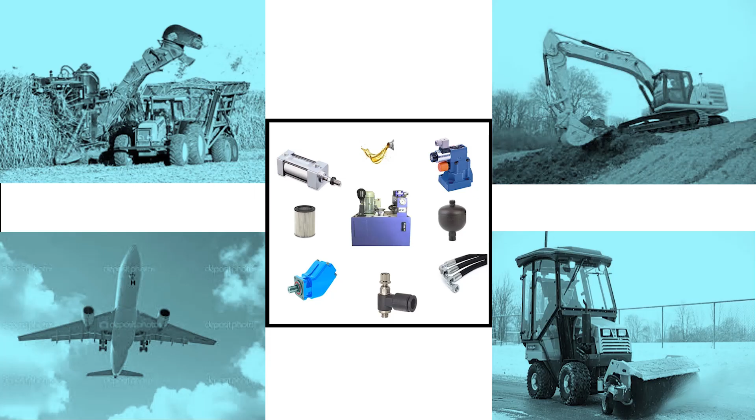Now we will see, in a certain hydraulic system design, it is desired that when the predetermined system pressure is reached, the pump should stop pumping further hydraulic oil to the system. This is possible if one can use a pressure compensated variable displacement pump.

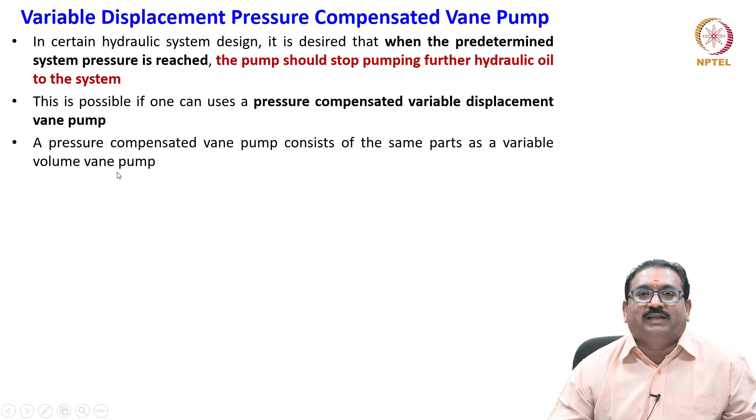A pressure compensated vane pump consists of the same parts as the variable volume vane pump we discussed, but in addition it has an adjustable spring which is used to offset the cam ring, as shown in the figure here. In the pressure compensated vane pump, we have one stiff spring which can shift the cam ring to the desired position.

When the system pressure acting on the inner contour of the cam ring is high enough to overcome the force set by the spring, the cam will recenter and, except for leakage, pumping ceases, meaning zero flow. System pressure is therefore limited to the setting of the compensator spring.

What is the arrangement here? In the variable displacement pressure compensated vane pump, all parts are the same - slotted rotor, cam ring, vanes - but shifting of the cam ring is done through the very stiff compensator spring, whatever pressure you set. For example, I am setting here 100 bar.

On the other side, the discharge pressure is acting. If the discharge pressure exceeds the setting pressure, it will push the cam ring to the center. When it is centered, oil will recirculate. This is the basic mechanism in the pressure compensated vane pump.

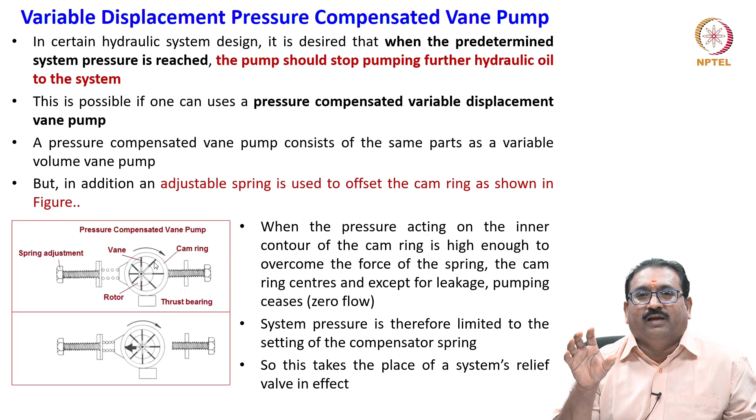When we are using the pressure compensated pump, there's no need for pressure relief valves because it performs the same function. Otherwise, every pump in a fluid power system is equipped with a pressure relief valve. With a pressure compensated pump, no need to worry, because automatic adjustment of the cam ring is done through the system pressure itself.

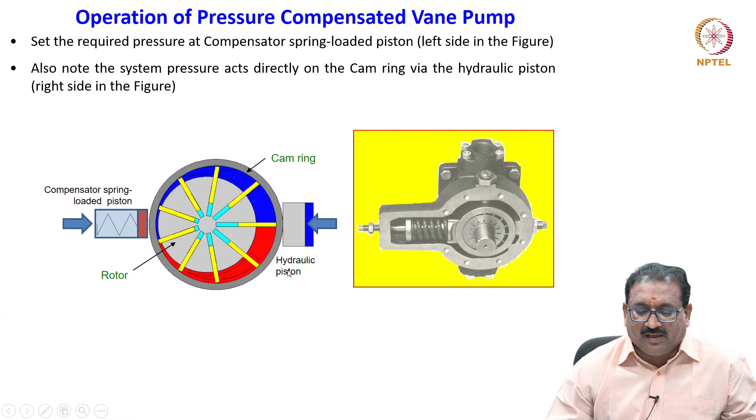How is this done? Set the required pressure at the compensator spring loaded piston. Also note the system pressure acts directly on the cam ring via the hydraulic piston on the other side, meaning the discharge pressure is acting here.

When the discharge pressure is zero at the beginning, the pump produces maximum flow because maximum eccentricity is provided by the spring pushing the cam ring. When the system pressure, meaning the discharge pressure, increases beyond the set pressure at the compensator spring, the system pressure pushes the cam ring against the compensator spring loaded piston to reduce flow.

When the discharge pressure continues to increase further, the hydraulic piston pushes the cam ring to achieve zero eccentricity and hence zero flow.

The mechanism here: this is a stiff spring used to push the cam ring, and on the other side the delivery pressure or system pressure is acting. If this pressure keeps increasing, it tries to push the cam ring against the compensator spring.

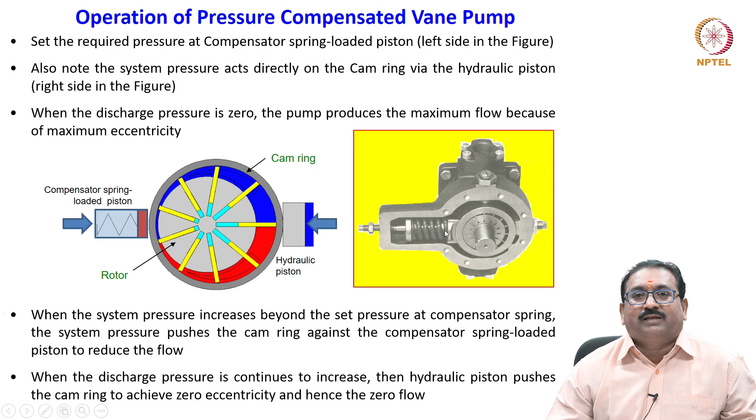Now I have drawn the pressure compensated vane pump's pressure versus flow graph. At maximum eccentricity, you get maximum flow. If pressure is increasing, you will see the flow change.

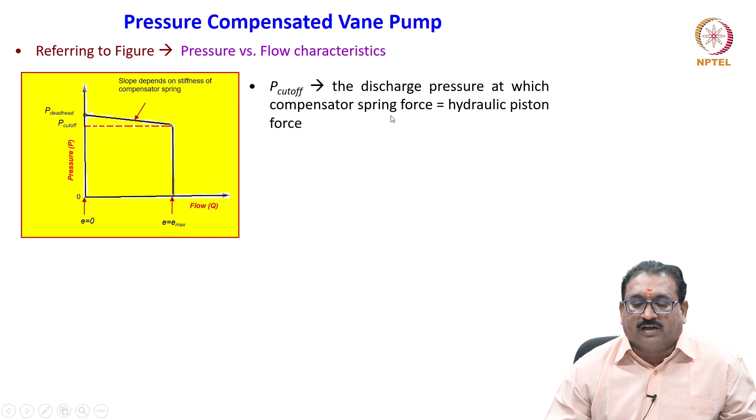What is this P cutoff? The discharge pressure at which the compensator spring force equals the hydraulic piston force - this is the P cutoff.

With further increase in system or discharge pressure, when the P deadhead pressure is reached, there is zero eccentricity and the pump will not produce any flow - zero eccentricity, zero flow. So the maximum pressure achieved is called P deadhead, at which point the pump is protected because it produces no flow.

As a result, there is no power wasted and no fluid heating.

Graphically, this pressure compensated vane pump is represented like this - as I told you, the symbol shows the outlet pressure of the pump always getting feedback against the compensator spring. When the force from the compensator spring matches the force from the system pressure, we call that P cutoff. If pressure increases further, you get zero flow.

This is also represented in another way. When the cam ring coincides with the rotor axis, there is no flow, correct? But leakage flow is there, which you can call the case drain, going to the tank.

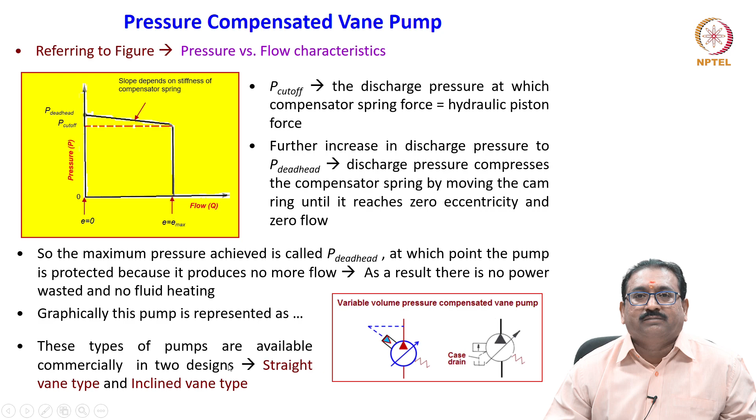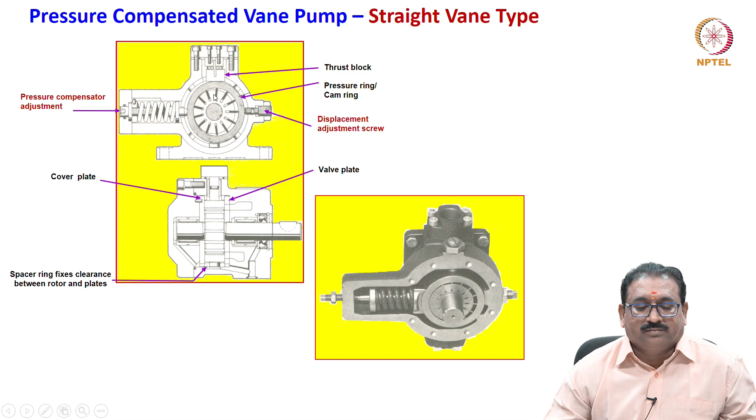These types of pumps are available commercially in two designs: straight vanes and inclined vanes. You will see the sketches here - this is the straight vane, vanes are straight. See here, straight vanes. Or the vanes are angular vanes, inclined at a certain angle.

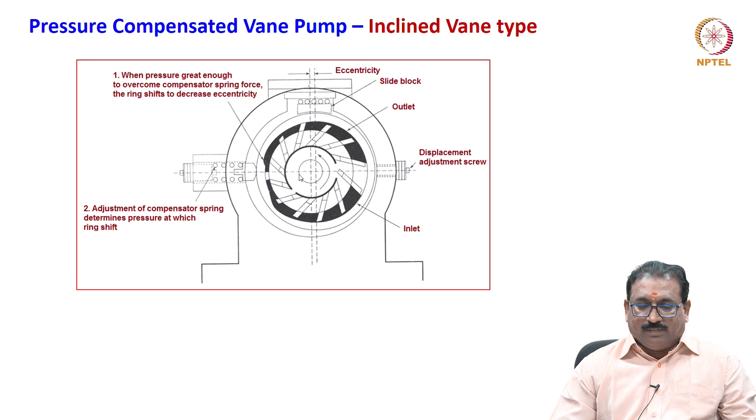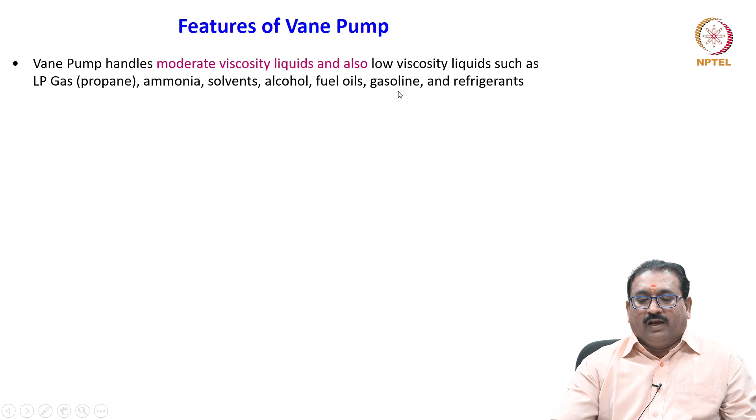Both designs are available in the pressure compensated vane pumps. Very quickly I will give you some features of vane pumps. Vane pumps handle moderate viscosity liquids and also low viscosity liquids such as LP gas, ammonia, solvents, alcohol, fuel oils, gasoline and refrigerants. No internal metal to metal contact and self compensation for wear enable them to maintain peak performance on these non-lubricating liquids.

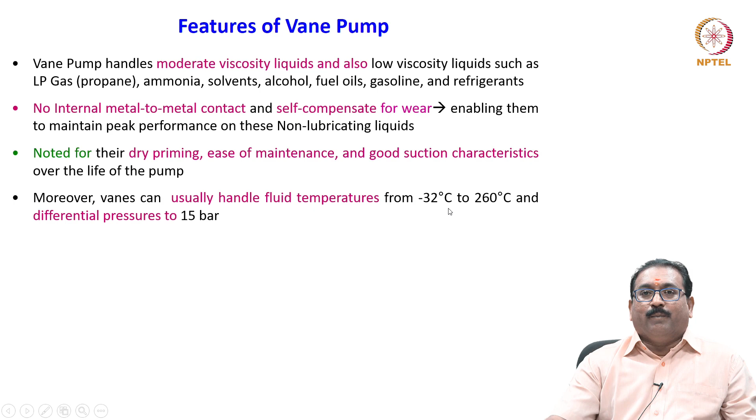Vane pumps are noted for their dry priming, ease of maintenance, and good suction characteristics over the life of the pump. Moreover, vane pumps usually handle fluid temperatures from -32 degrees centigrade to 260 degrees centigrade, and differential pressure up to 15 bar.

The discussed vane pumps are hydraulically unbalanced. What is this, friends? As we have seen in all the cases, the outlet pressure is higher than the inlet pressure, meaning this discharge pressure is acting on the vanes as well as on the rotor bearings. So there is always a side load exerted on the bearings of the vane pump because of the unequal pressure - outlet pressure is much higher than the inlet pressure. That is why it is called hydraulically unbalanced.

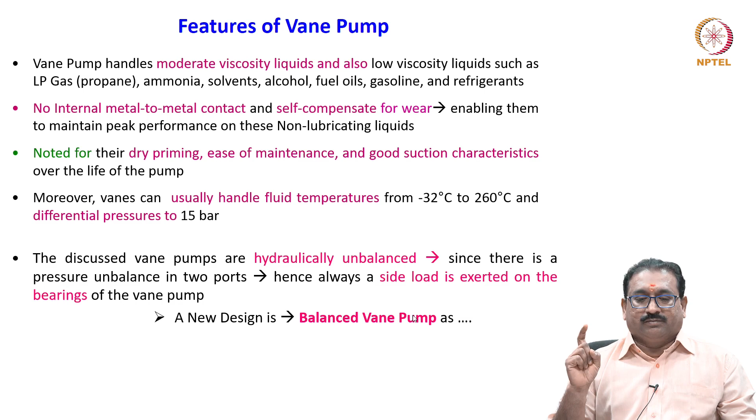What to do now, friends? New designs are available, what you can call a balanced vane pump, where a hydraulic pressure balance is achieved during operation. You will now see the balanced vane pump shown here.

What are the changes, friends? Here you will see the rotor, then you will see the elliptical housing or bore. The bore is in elliptical shape, but the rotor - you will see the elliptical housing bore and the rotor axis are coincided. No eccentricity here.

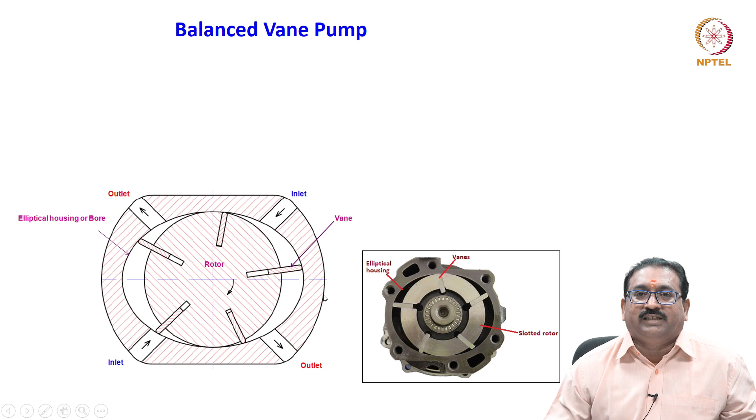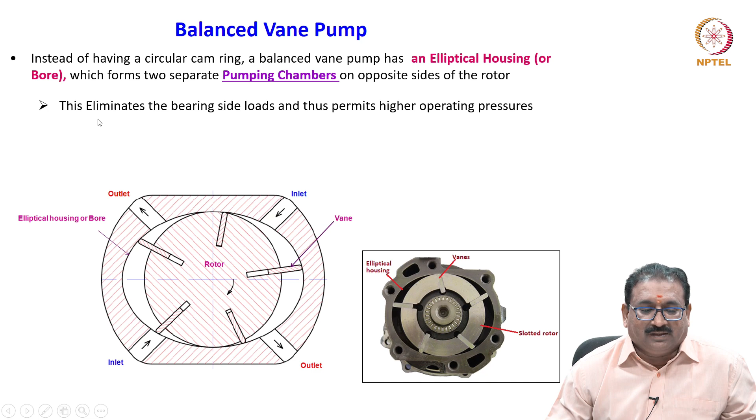So here, instead of having a circular cam ring, a balanced vane pump has an elliptical housing or bore which forms two separate pumping chambers on opposite sides of the rotor. This eliminates the bearing side loads and thus permits a higher operating pressure.

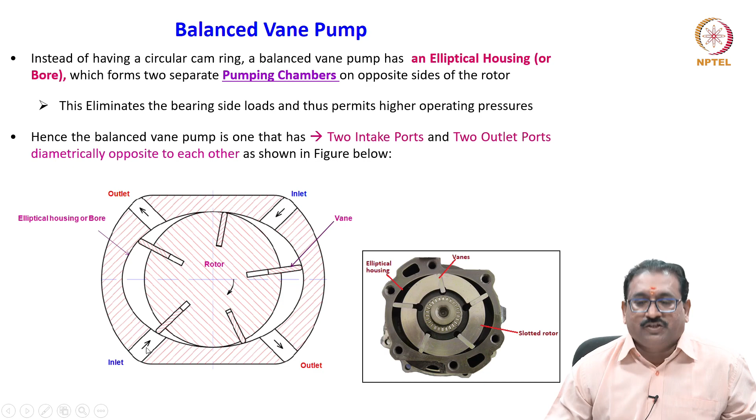Hence, the balanced vane pump is one that has two intake ports and two outlet ports diametrically opposite each other, as shown in the figure here. Two inlet ports and two outlet ports due to this design, but the opposite ports are pressure balanced. Also in actual practice, the inlets and outlets are connected to the respective ports.

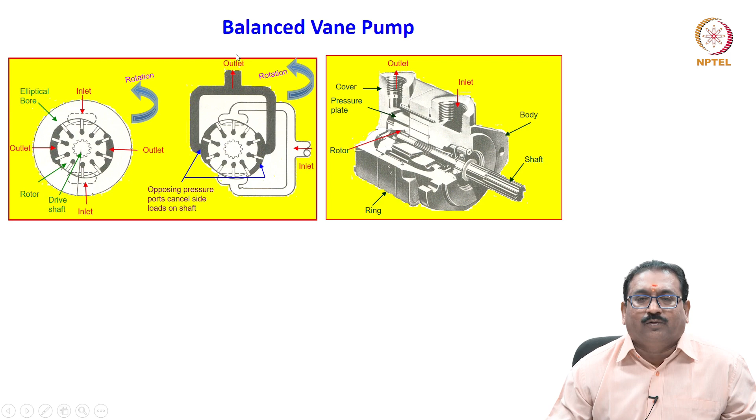Please note, the balanced vane pump is completely hydraulically balanced because the pressure ports are situated diametrically opposite. You will see diametrically opposite.

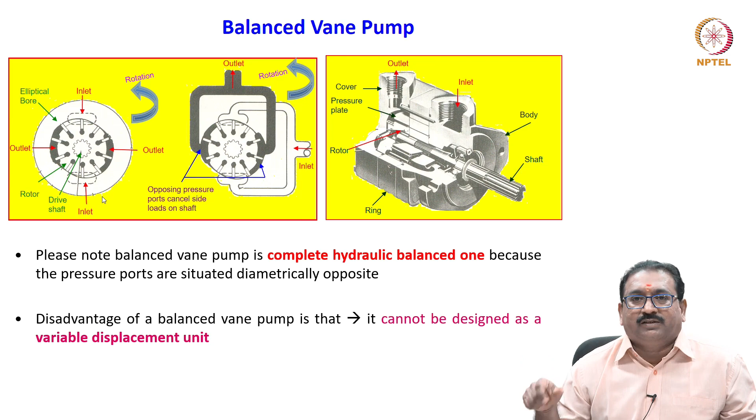Disadvantage of the balanced vane pump - what is that? It cannot be designed as a variable displacement pump because the bore diameter is fixed during the design stage itself, and the rotor is circular instead. You can't vary this.

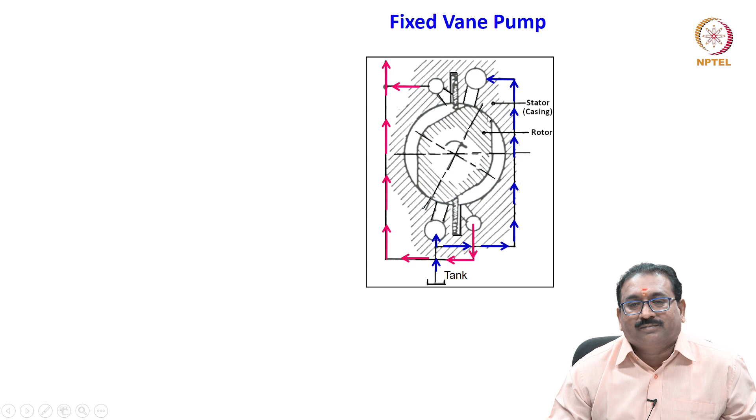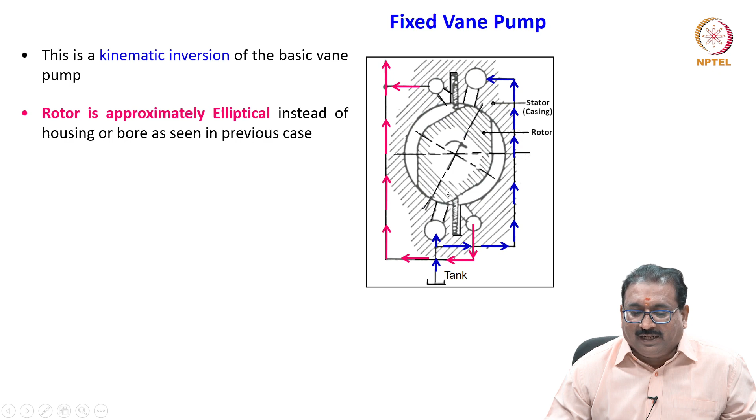Similarly, you will see here, friends, the rotor shape - see the rotor shape and the casing or housing, circular housing, but the rotor has this shape. This is a kinematic inversion of the basic vane pump. The rotor is approximately elliptical instead of the housing or bore as seen in the previous case.

The basic difference is that spring loaded vanes are fixed in the casing - you see spring loaded vanes, all are spring loaded vanes. They do not rotate with the rotor as seen previously, however they can move along the slots. When it rotates, based on the shape of the rotor, the vanes will come in and out.

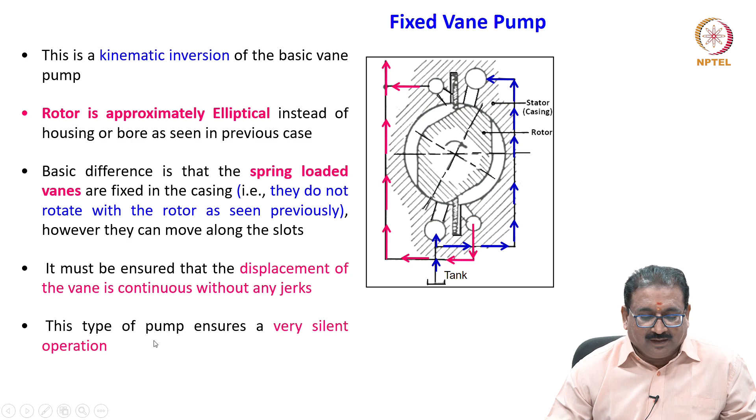This creates, similar to before, suction and discharge - the oil will be sucked here, it will go, then during the other half revolution, oil will come here and go out. Again it is two inlets and two outlets. It must be ensured that the displacement of the vane is continuous without any jerk. This type of pump ensures very silent operation.

Quickly we will see some numerical problems on vane pump.

A vane pump is to have a given volumetric displacement. It has a rotor diameter of 50.8 mm, a cam ring diameter of 76.2 mm, and a vane width of 50.8 mm. What must be the eccentricity?

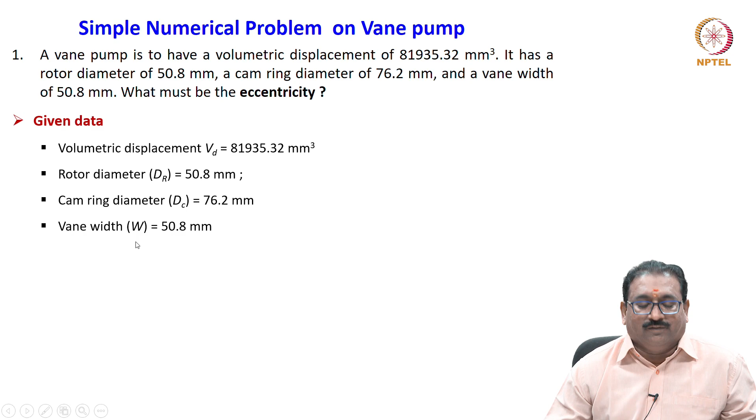Here the volumetric displacement is given and we have to find the eccentricity. Using the same geometrical relations, the given data are volumetric displacement, rotor diameter, cam ring diameter, and vane width. The volumetric displacement of the vane pump is given by Vd equal to pi by 2 times dc plus dr into E into W. Substituting all the values, you will get the eccentricity as 8.085 mm.

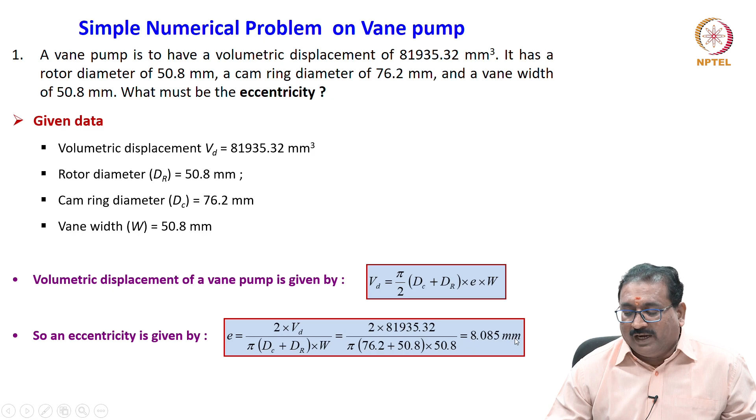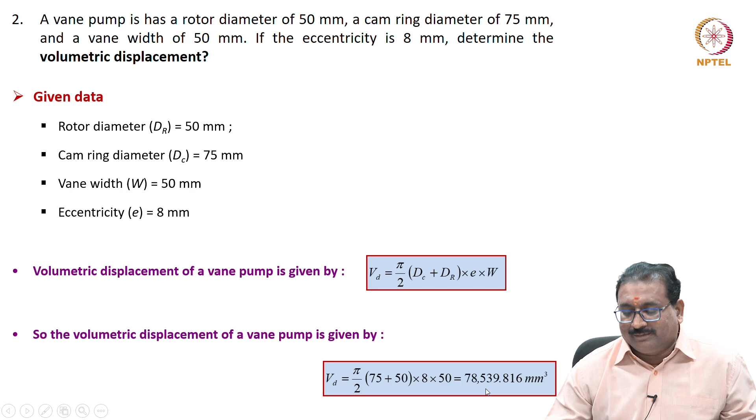Compared to the previous problem, now we have to calculate the volumetric displacement. The given data are rotor diameter, cam ring diameter, vane width, and eccentricity. We will use the same formula for volumetric displacement based on the geometry: pi by 2 times dc plus dr into E into W. Substituting all the values, you will get this much mm cube of oil discharged.

Very quickly we will see one more problem. A fixed displacement vane pump delivers 68.95 bar oil to an extending hydraulic cylinder at 75.71 liters per minute. When the hydraulic cylinder is fully extended, oil leaks past its piston at a rate of 2.65 liters per minute. The pressure relief valve setting is 82.74 bar.

Now we will assume that if we use a pressure compensated vane pump, it would reduce the pump flow from 75.71 liters per minute to 2.65 liters per minute, meaning it goes from maximum flow to leakage flow. It will reduce automatically if you use a pressure compensated pump. So now, how much hydraulic horsepower would be saved by using the pressure compensated vane pump?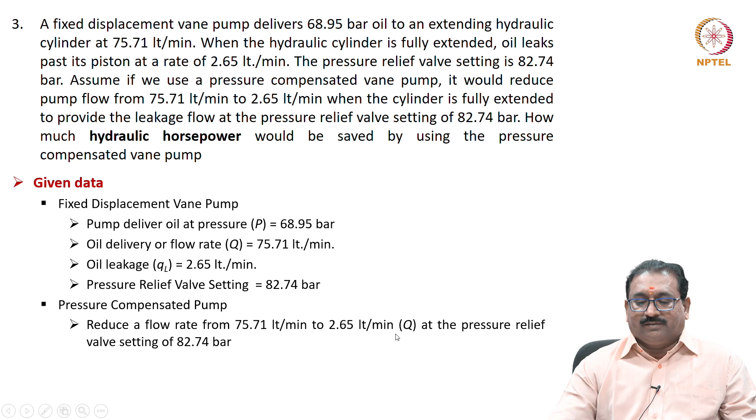To solve this, you calculate the hydraulic horsepower for the fixed displacement pump, and similarly calculate the hydraulic horsepower for the pressure compensated pump, then take the difference. The given data for the fixed displacement pump are delivery pressure, flow rate, oil leakage, and pressure relief valve setting. For the pressure compensated pump, it is important that it reduces the flow rate from 75.71 liters per minute to 2.65 liters per minute at the pressure relief valve setting of 82.74 bar. How much horsepower is saved if you use a pressure compensated pump?

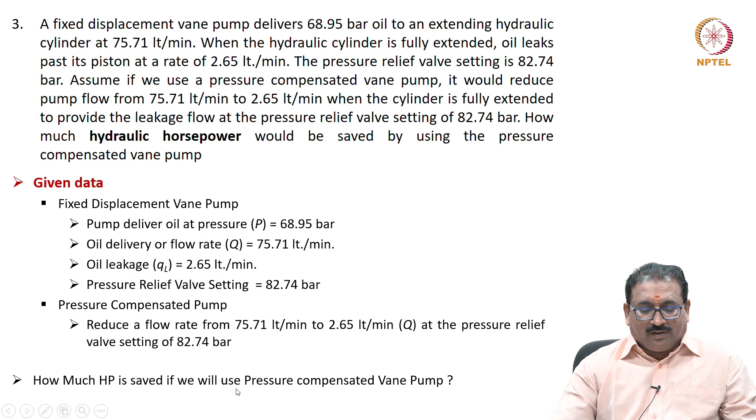For this, how do we start? The hydraulic horsepower in the fixed displacement pump: power equals pressure into flow rate divided by 600 to get kilowatts. Substituting all the given values, I get 10.44 kilowatts. Converting the power lost to horsepower, noting that 1 HP equals 745.7 watts, I get 14 HP.

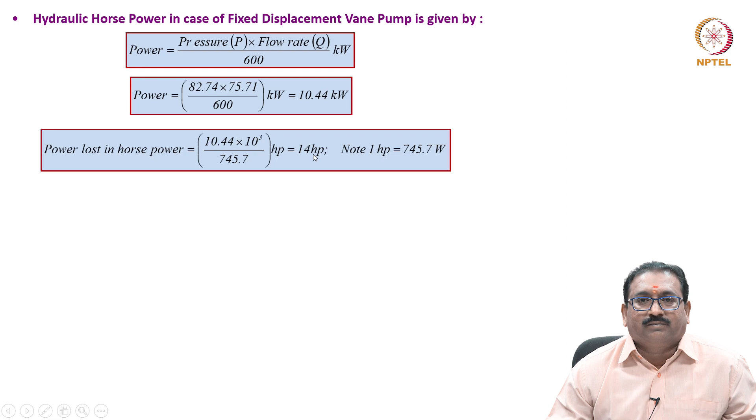Similarly, for the hydraulic horsepower in case of the pressure compensated pump, it is pressure into 2.65 divided by 600, which gives 0.365 kilowatts. Converting the power lost to horsepower similarly, dividing by 745.7, I get 0.49 HP. Here you see the difference: 14 HP versus 0.49 HP, a large difference. Hence, the hydraulic horsepower saved when using the pressure compensated pump is 14 minus 0.49, which gives us 13.51 HP.

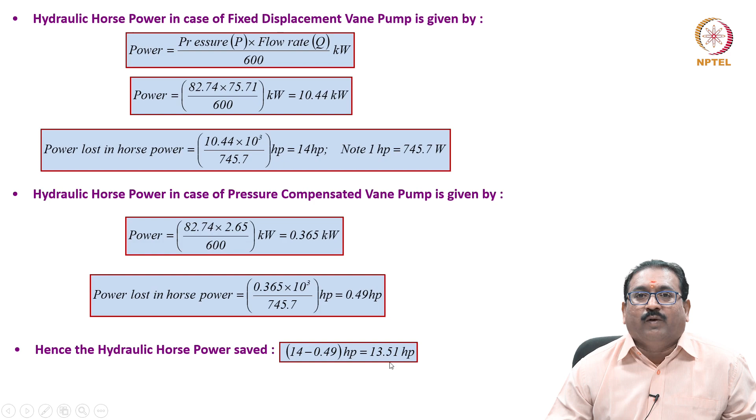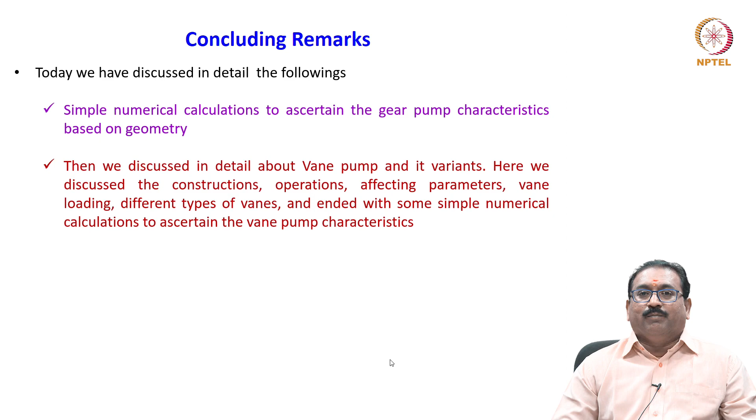Okay friends, we will conclude today's lecture. We have studied the following: simple numerical calculations to ascertain gear pump characteristics based on geometrical parameters, then we discussed in detail the vane pump and its variants, including constructions, operations, affecting parameters, vane loading, different types of vanes, and ended with some simple numerical calculations to ascertain the pump characteristics.

Okay, we will stop now and discuss piston pumps in the next class.